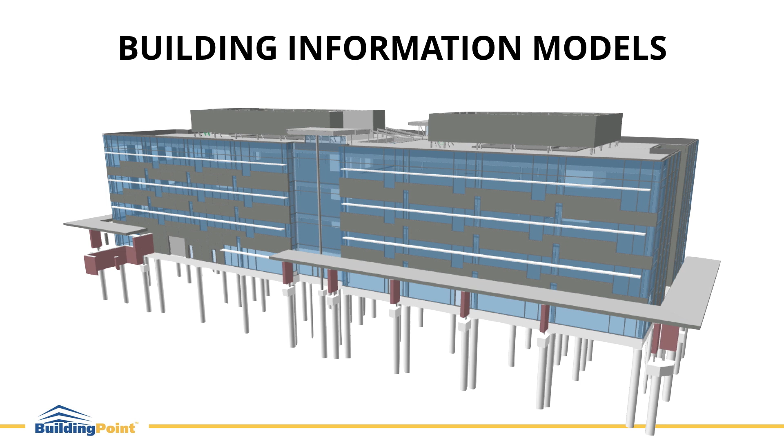Models are becoming more popular. We're starting to see a lot of virtual design and construction, or BIM, in pre-construction phases. Architectural, structural, and MEP models are being brought together to coordinate and make sure constructability issues are detected before the actual construction begins. This is a benefit to all companies involved.

Oftentimes, though, these coordinated models don't make it to the field, as the industry is still dominated by 2D plans, both in paper and digital forms.

Trimble wanted to offer a solution for combining 2D drawings, 3D models, and project controls into a single solution with markup capabilities. And the result of this desire is ProjectSight.

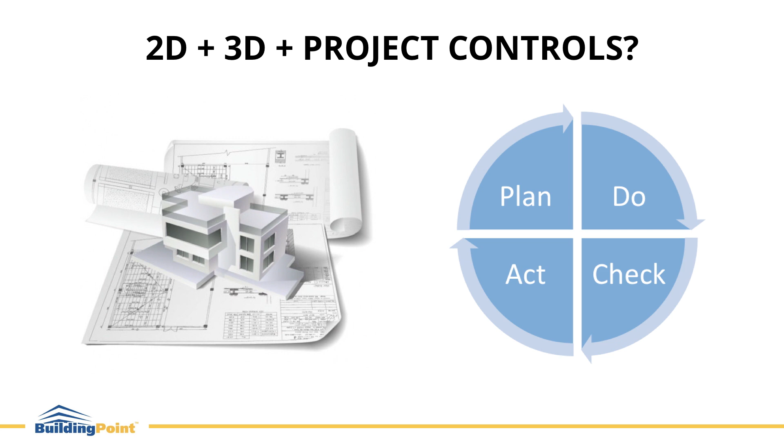ProjectSight is a browser-based solution hosted by Trimble and also offers an iPad application for workers in the field.

2D drawings and 3D models are the starting points for collaboration. Records and collaboration must be tied to these models and drawings, putting the data into context. All of the common silos need to be eliminated, and the construction documents, records, and collaboration all need to be in a single place. And the solution needs to be easy.

Easy to access, easy to learn, and of course, easy to use.

Let me show you some of the highlights of ProjectSight's capabilities before I dive into a demonstration.

When you are in a project in ProjectSight, you have access to a number of modules, including drawings, models, file library, document control, and field management. The navigation is intuitive, and the tiled display is common throughout.

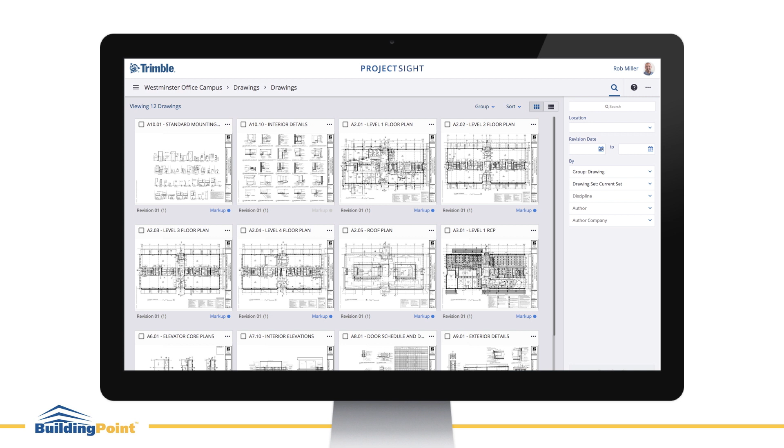In the Drawings module, you can view thumbnails of the uploaded and approved drawings. Selecting one of the drawing tiles will open the PDF in a high-fidelity viewer.

Drawing annotation tools provide a quick way to mark up an area on the drawing for communicating with team members.

You can link your annotation to records such as RFIs, issues, or submittals, other drawings, 3D model views, web URLs, or even files. Your record content appears on the drawing screen, meaning there is no need to leave the drawing to review the questions, issues, or assignments.

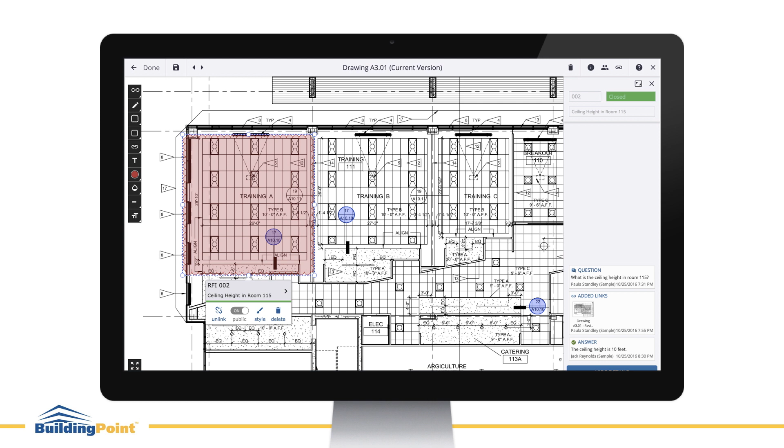Team conversations directly in the record allow you to collaborate with team members through messaging, both in a browser and the mobile app. You can even respond to questions via email, and they will be added to the conversation in ProjectSight. Maximizing the record will show all information, including a detailed conversation view.

All attachments are available from here as well: files, drawings, web links, and 3D model views.

You can use the power of Trimble Connect to link records directly to 3D views for a different perspective, often helping team members to visualize and understand the item in discussion.

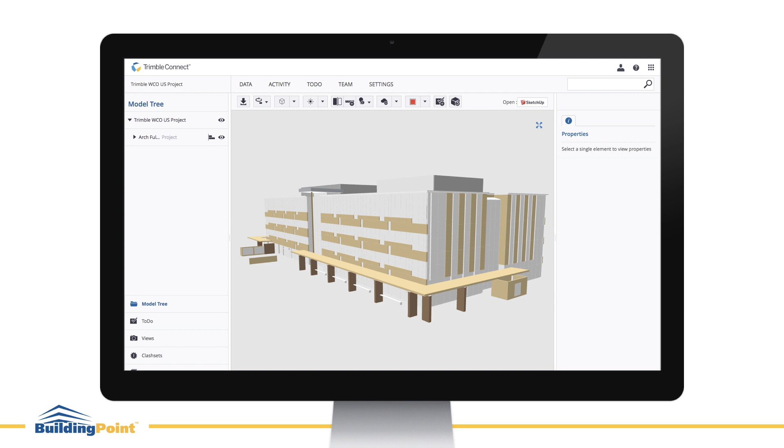Records are color-coded and easily searchable in a dedicated view. Tiles are used to easily visualize important details.

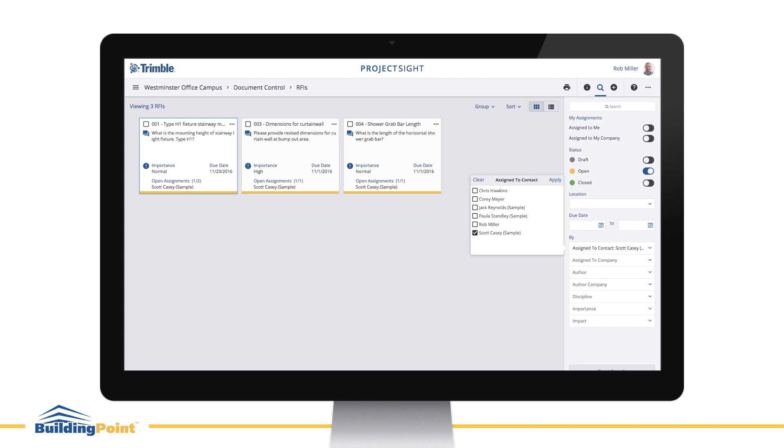Because there is so much information pertaining to your project, you need a quick and easy way to get to what matters. ProjectSight's search panel does exactly this. With filters and contextual search, you can easily locate what you are looking for.

Data security is crucial. You want to be sure that the project team members can access information, but also that they only edit the data that is relevant for them.

Mobility is key for construction. You need your project controls to be accessible by the boots on the ground, and ProjectSight supports this.

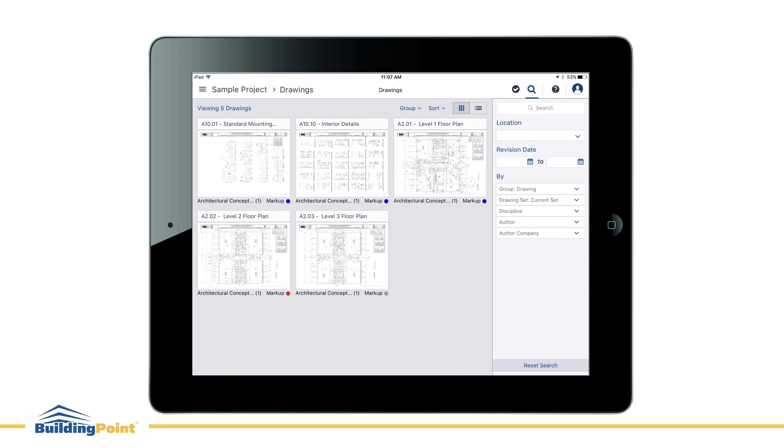ProjectSight syncs data to your iPad for offline access to the very same application as in the browser. The ability to view drawings, cloud areas of interest, assign records, and even collaborate on records is available on the iPad and works exactly the same as it does in the browser.

Now, let me take some time and demonstrate ProjectSight for you.

When I first log into ProjectSight, I'm presented with the portfolios that I have access to. A portfolio is really a collection of projects. If I'm a GC, a portfolio could be projects tied to a specific owner, or based on the type of project such as healthcare or commercial.

For trade contractors, they would likely have a portfolio for each GC that they're working with. Keep in mind that users only have visibility to the portfolios and projects they've been given access to. Let me go back up to my portfolios, and I'm going to enter my BuildingPoint portfolio, and we're going to work inside our Westminster office campus project.

Within the project, you can see that we have access to the different modules: drawings, models, file library, document control, and field management. Keep in mind, this is all driven by the permissions that the user has based on their defined role, so you can prevent certain users from accessing certain modules if it's important.

Now we'll go ahead and start off inside of our drawings. When I go into drawings, I have two options: drawing sets and drawings. The drawing sets is where we're going to be uploading and publishing drawing set revisions. We'll come back to that. For right now, we're actually going to start in the drawings themselves.

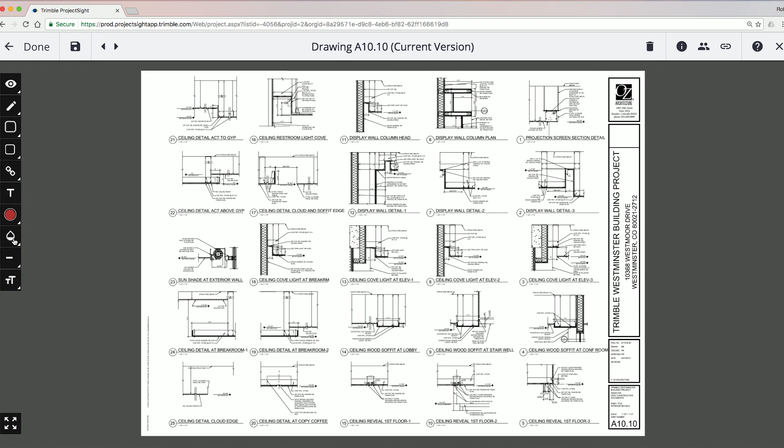Let's go back to one of the other drawings to look at some markups and do some of our own markups on. I want to open A2.01. When I come into this drawing, you'll notice there are already markups on the screen. We have several markups. The first one, this blue one, is actually a hyperlink.

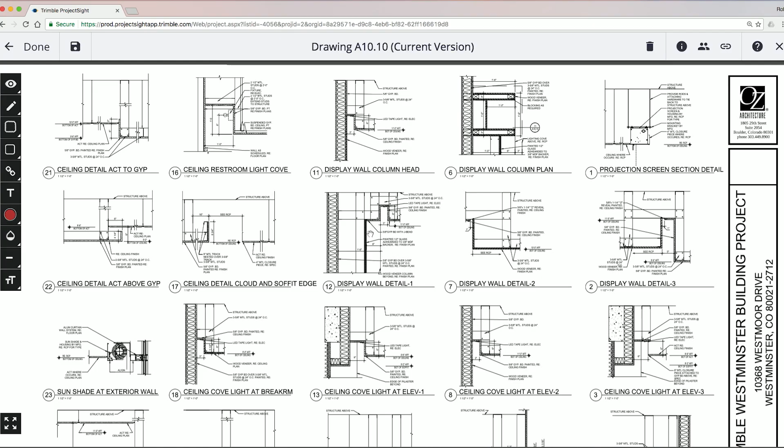If I click on it, I can see this is a hyperlink to drawing A10.10. If I click on that in this view, ProjectSight will go ahead and open that drawing, A10.10, for me, and now I have access to easily jump to that drawing. If I'm done with that, simply select done, and it takes me right back to the drawing A2.01 where I was. So those are hyperlinks.

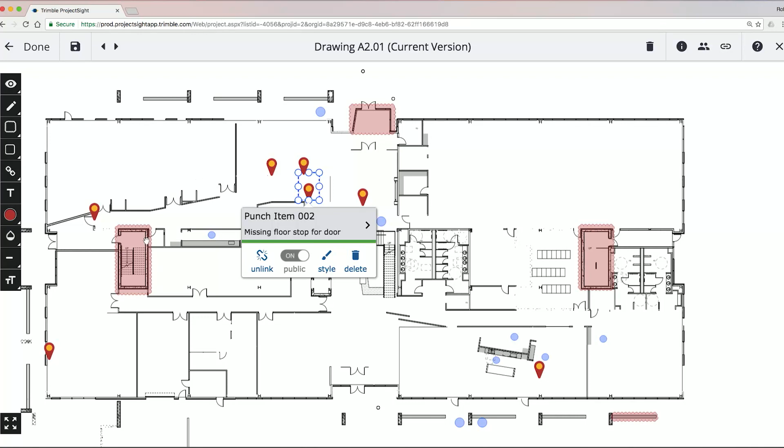We also have, in this case, this item here is a punch list item. And you also see the red clouds. These red clouds are actually, this one in this case, linked to an RFI 001. If I select on this RFI, you'll see over on the right hand side it opens up a panel that gives me information about this RFI.

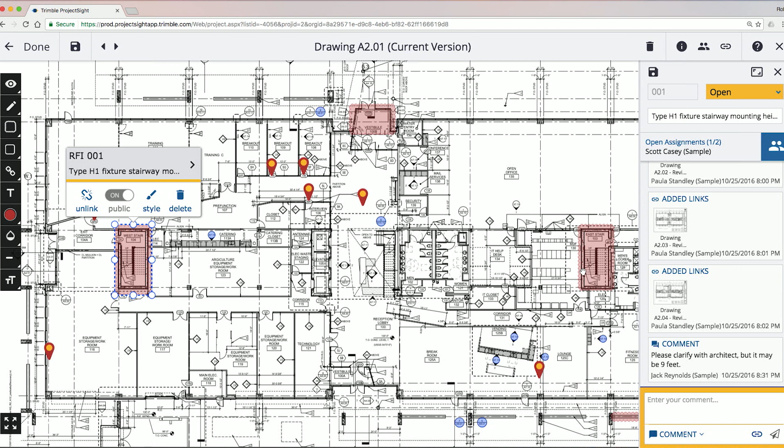So I can see the question that was asked, any links that have been added, and any comments or answers that have been assigned back to this RFI. Now, this one is just a question about an area in a drawing, but I actually have another one down here I want to look at. When I select on it, you'll see it pulls up an image of a 3D model.

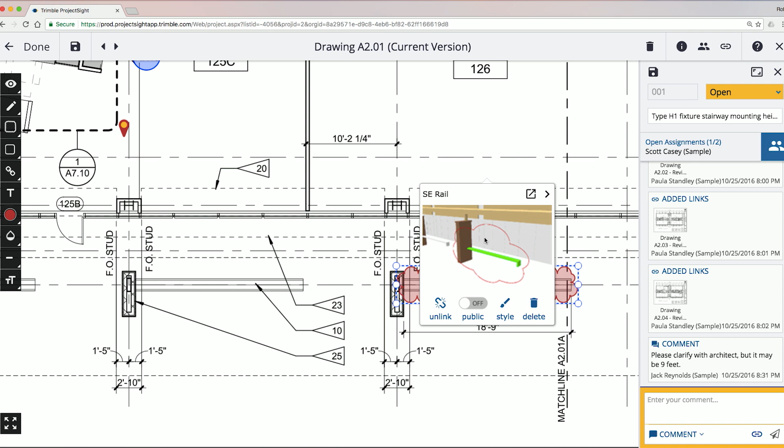So this RFI is actually linked to a location in a 3D model inside of Trimble Connect. And just like with the other documents, if I simply click on this, it will take me to that location in Trimble Connect.

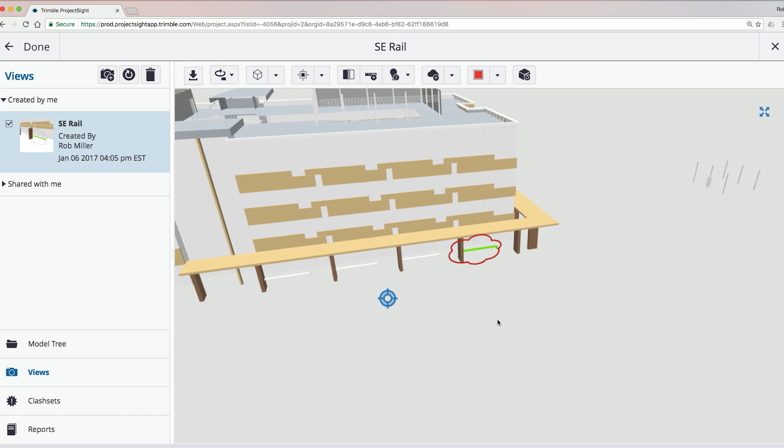So here we are, Trimble Connect opened inside ProjectSight, and it took me right to the exact location of that saved view. Here in ProjectSight, inside Trimble Connect, I have the ability to view this entire 3D model. I can change my visibility, orbit and pan around this project as I need. It's an easy way to jump into a 3D model and get another perspective on the data or the RFI in question, which can sometimes be easier to understand than just looking at a set of 2D drawings.

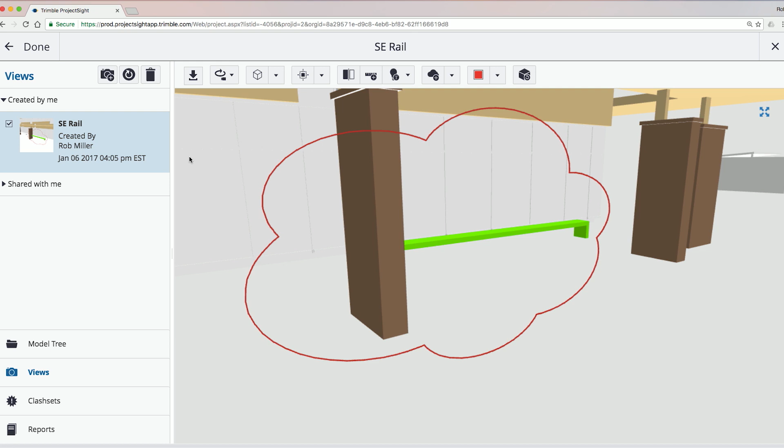Now, if I select done, it'll take me right back to where I was.

Now, we've looked at some of the hyperlinks in here, some of the records. I'm going to go ahead and create my own area that I'm going to cloud, and I'm going to create an RFI from this. So I'll just cloud this area here around Training Room C, and I'm going to link this.

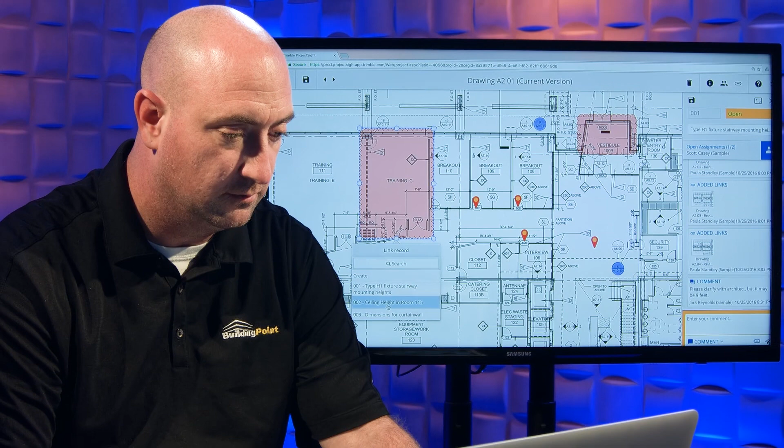Now, when I select a link, I have an option to upload files, link into a drawing, a record, something in the library, the model view, or even a web address. In this case, I'm going to link it to a record, and I want to link this to an RFI. I can see all the RFIs that are already created, so if the RFI I need has already been created, I can simply link it. In this case, I don't have one yet, so I'm going to create a new one.

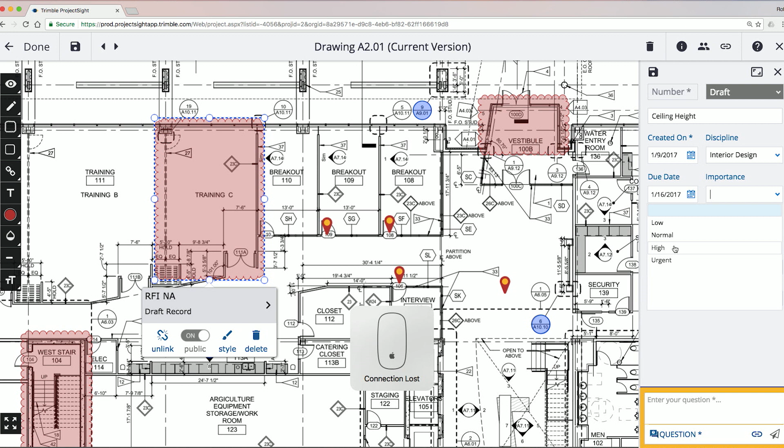The panel opens up on the right, and I can go ahead and enter the information about my RFI - the date it was created, set it to a discipline if I need, set an importance on this, and assign it to a location if I have one, and assign it to a person. So I'm going to assign this to somebody in my project, and I'm going to ask a question.

We'll go ahead and save that. And now because that has been assigned, that person has actually been notified via email that they have an RFI assigned to them. They can either respond through email and their comment will come back into ProjectSight, or they can log in directly and enter comments or answer the question.

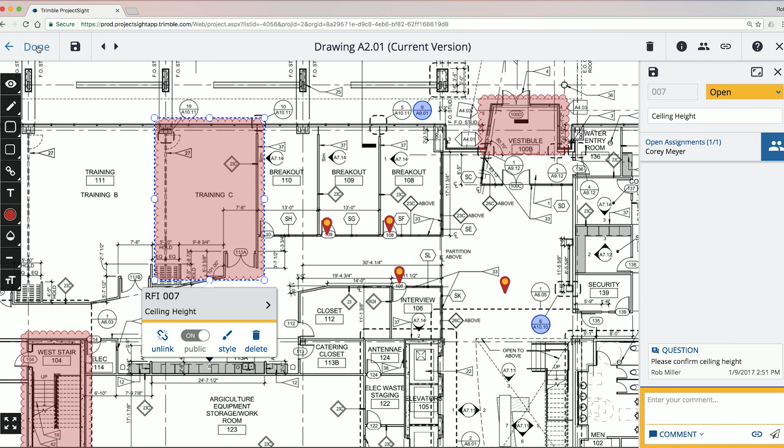Now, we're done inside here. I want to go back and look inside of the document control area. Inside document control, I have access to my action items, issues, submittals, and the RFIs I was just looking at. So if I dig into my RFIs, I can see all of the RFIs related to my project. Now, I only have a few here, but imagine having a lot more and trying to find a specific one. As I mentioned earlier, ProjectSight gives you a great way to filter through these results and even contextual search.

So I can easily just toggle and isolate the ones that are just open. I also have an option to filter it by location, so if I just want to find all RFIs related to the skin location. And likewise, I can actually do this based on assigned to a contact or assigned to a company.

So it's very easy to navigate through and filter down the data to find exactly the RFIs that are of interest to you. Now, if you click on the RFI, you get the panel on the right that shows all the information about the comments or the added links. But up here, I can expand this view and get more information about the RFI itself. So here you can see I have a full list of everything that's happened, all of the comments, the question that was asked, again, the files that have been attached, and any comments back or answers.

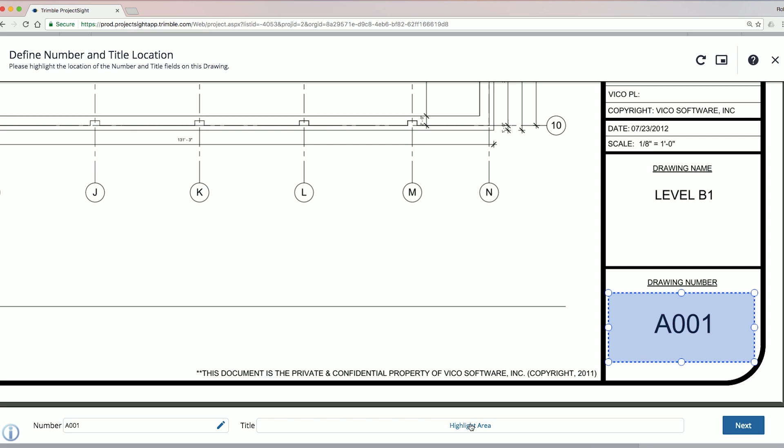Once I'm in here, I can select to highlight the area of the drawing number, and then select to highlight the area of the drawing name. When I select Next, ProjectSight will go through all of these drawings and extract both the drawing name and number. As you can see, it's represented here in the number column and the title. So I don't have to manually edit these. ProjectSight automatically extracts those once I've defined the location.

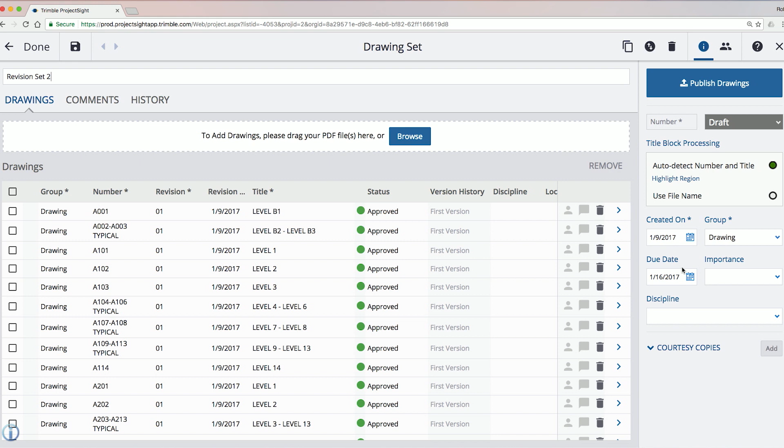Now I have this new set of drawings, and I want to publish it. I'm going to call it Revision Set 2. I'm happy with it, and I can hit Publish. Once I publish this, it replaces the previous as the current drawing set.

Now I want to talk a little bit about security and access control. I'm going to go to my portfolio settings. Remember that any settings I apply to the portfolio, I can then enforce these for all of the projects contained within that portfolio.

We've talked a little bit about the users. Now we're going to go to the roles, and we can see I have 5 different roles defined. If I look at the standard user, I can see what permissions they have - no administration permissions, but permissions for file library, links, reports, and so on. If I look at the records themselves, whether it's drawings or field management like checklists, I can set permissions based on the role as to what they're allowed to view, create, comment, modify, and/or remove.

ProjectSight also has help built in. If I come up here to the top right, I have a question mark. This will open up help and drive me to the help location based on where I am when I select it. So I can get information about creating and editing roles just by selecting the help button when I was in the portfolio settings. I can also look at different settings I want, such as permissions related to the portfolio.

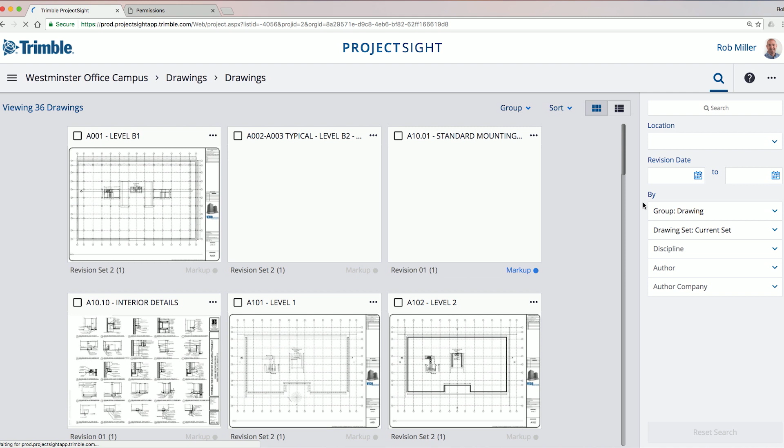To close out this demo, I want to reiterate the simplicity of ProjectSight. You've seen the tile interface that's very easy to navigate, and it's consistent throughout the application. When we're inside the modules, we have this right panel which gives us information about comments and other attached files, and gives us the ability to search and filter through our data, making it extremely simple to navigate and get up to speed with this application very quickly.

Now you should have a pretty solid understanding of what ProjectSight is and hopefully how you could benefit from it in your organization. The keys I hope you take away are that ProjectSight offers drawing and model collaboration in a single environment. You have full control over who can access the projects and even restrict what they can view and edit within the project. ProjectSight is browser-based, and you can also work offline using an iPad. Finally, ProjectSight is designed as a single location for team collaboration for a variety of project data and records.